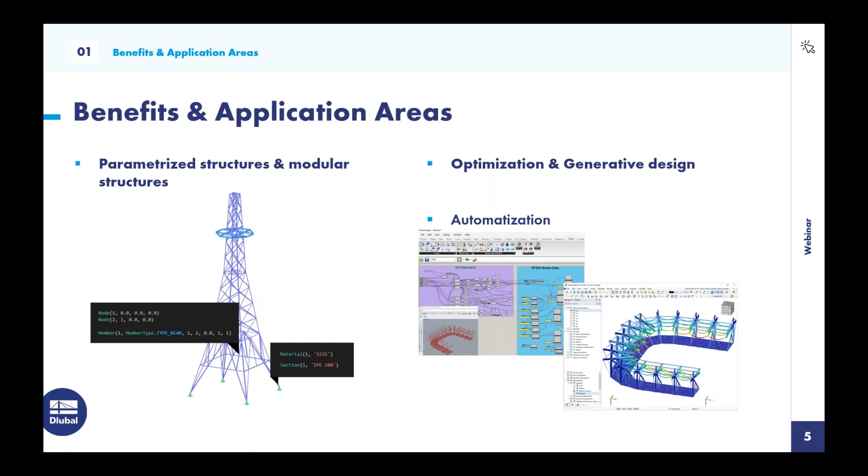So what is an API? API stands for Application Programming Interface. It is basically a messenger; it takes requests, translates, and returns responses. It is a communication protocol between multiple software or services to interact with each other.

To understand the concept better, here is an example. A graphical user interface is the communication protocol between humans and software programs. Most of you are using the RFEM interface and give the program commands with the help of buttons or inputs. In our case, an API has the same function, but between one software and another software.

What are web services? Actually, web services are a form of API, and the distinction lies in style and the way of communication. Web services are XML-based information exchange systems. In our case, we are using an HTTP technology called SOAP, which stands for Simple Object Access Protocol, to make this connection happen. To use this connection in structural analysis and design, frameworks prepared by our team serve very basic functions, which enable the user to give RFEM commands and get responses.

So what's the difference between COM and web services, and why have we changed our technology? Well, RFEM 5 is a native Windows application, it only runs on Windows operating system. RFEM 6 is a platform-independent software which is compiled on Windows, macOS, and Linux. COM technology was a Windows feature which runs on Windows only.

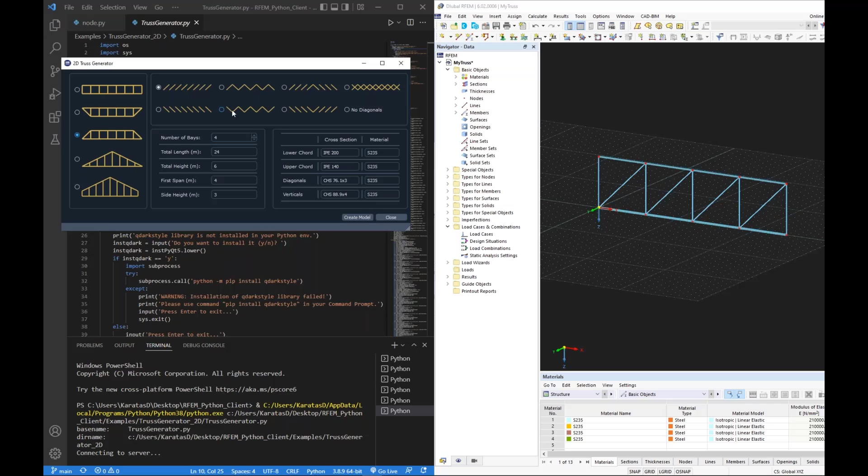If you would like to change the configuration, let me select another configuration for truss and another configuration for diagonals. I'm going to click create model again. And my truss is created.

I can edit the geometry inputs here. Let's say 8. I'll click create model again. And there's a new connection and the truss is created.

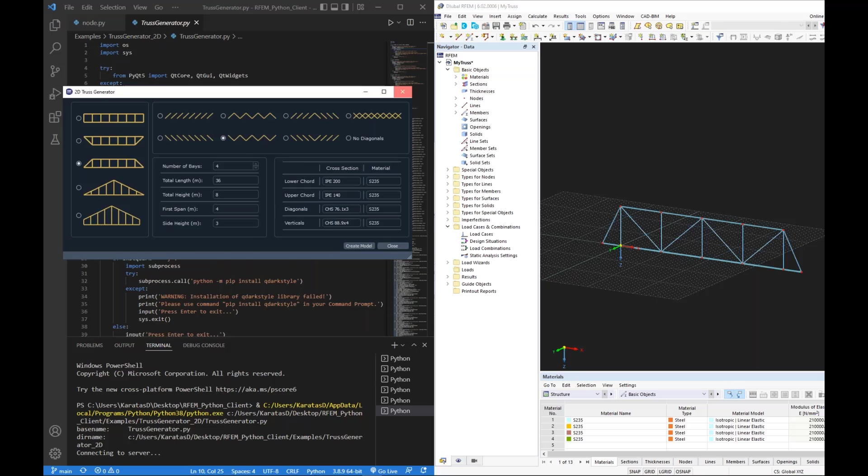Yeah, it's a cool example, I think, and I'm going to show you some other examples. Let me open my new folder. I have prepared some examples for the webinar.

Here I have a tank creator example, which is a console application. It takes 3 inputs for creating a steel tank. These inputs are diameter of the steel tank, height of the tank wall, and height of the arc. If I run this file, there will be a new model named steel tank, and there will be some inputs in the terminal for the parameters.

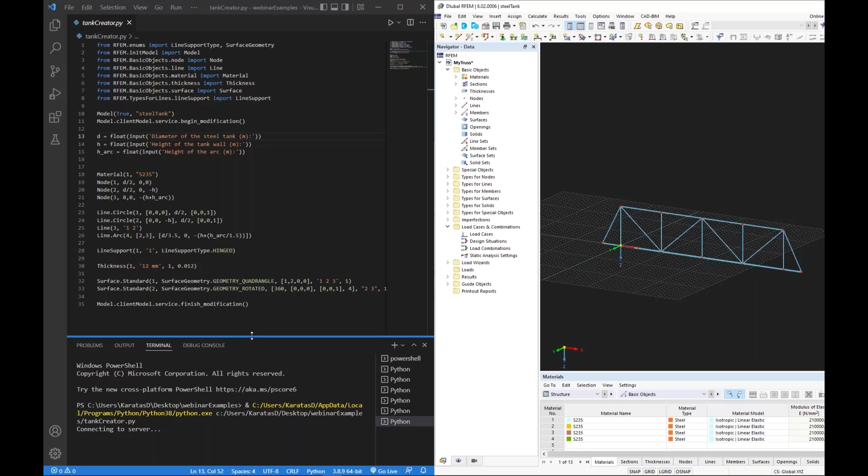Okay, my model is created, steel tank, and my terminal is asking me diameter of the steel tank. Let's say it's 12. The height of the tank wall, let's say 6. And height of the arc is 2.

I'm clicking enter, and objects are updating. Objects are updating in the RFEM now. And my tank is created.

If you would like to edit this script to your needs, you're free to do that and create your own console applications or own graphical user interface. It's that easy. Okay, now I would like to create an example from scratch, and I will be coding this and explaining every line step by step.

Okay, I have created an example here. Let me make it bigger. It's an arced beam with a section IPE 200, with a height of 3 meters and a length of 5 meters. I will create this geometry, create some loading, and take the results. Let me just create a Python file here named arcedbeam.py.

Now the first thing I have to do is import my libraries. I will begin with init model, which contains the Model class. The Model class is important because it's initializing the connection with RFEM6. After that, I need to call the all function from init model. I will be explaining these functions in the code.

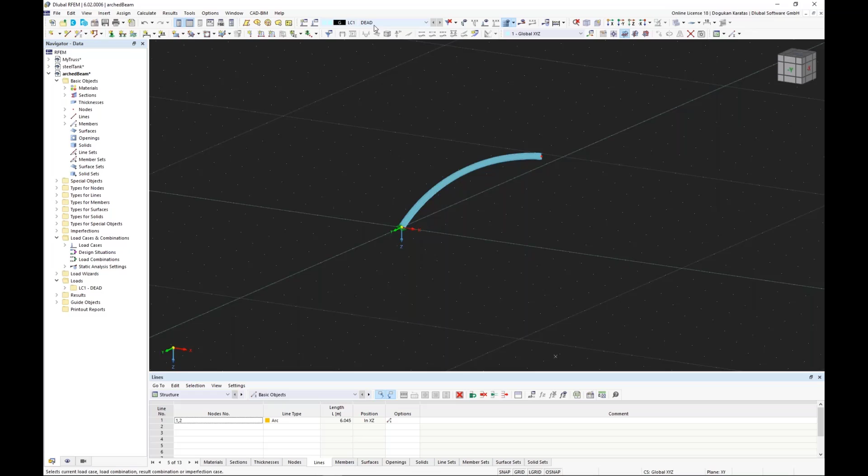Okay, let me make it full screen, and you can see our load case has created, named DEAD. Also, we have the static analysis named linear and self-weight consideration here 001.

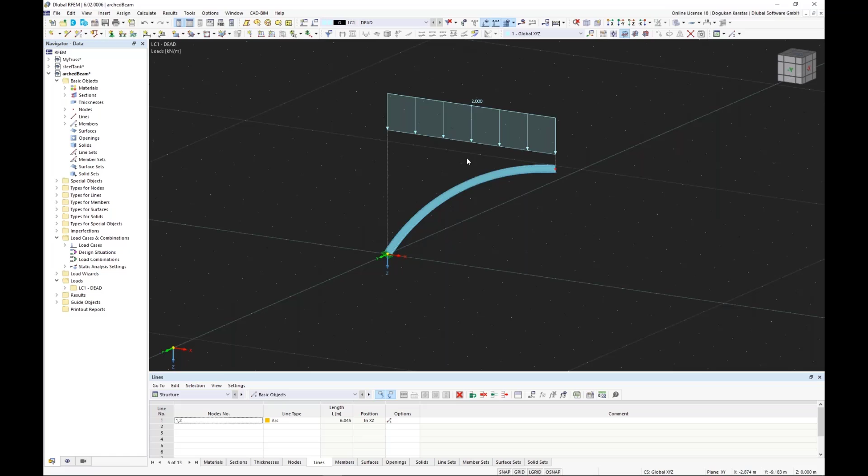Okay, and you can see the loading by clicking this. You can see this is projected set. And of course, since we have calculated, the results are already ready. You can click the results and you can see the results here in the model.

Okay, but for the post process, you would like to get the results out. So I would like to show you some examples how to get the results out. So we have some libraries for exporting results named import export.

And I would like to export the results, and I'm going to import some classes here. You have some choices here. Export the CSV, XML. I would like to show you CSV. Also, I would like to show you the XML file, the result tables here. And additional, we have a report, which is in HTML context. I'm going to import it also.

Export result tables to HTML. Okay, I'm going to export my results. Let's begin with the CSV. I'm opening my brackets, and the only attribute is the path. Okay, I just want to give the same path here. I'm copying my path here, and I'm going to change this name as results CSV.

I would like to create some results tables to XML. I'm copying the same path and rename it as results XML. And finally, I would like to export results to HTML. Okay, I need to give the path again. Results HTML. I have to use the R here. Okay.

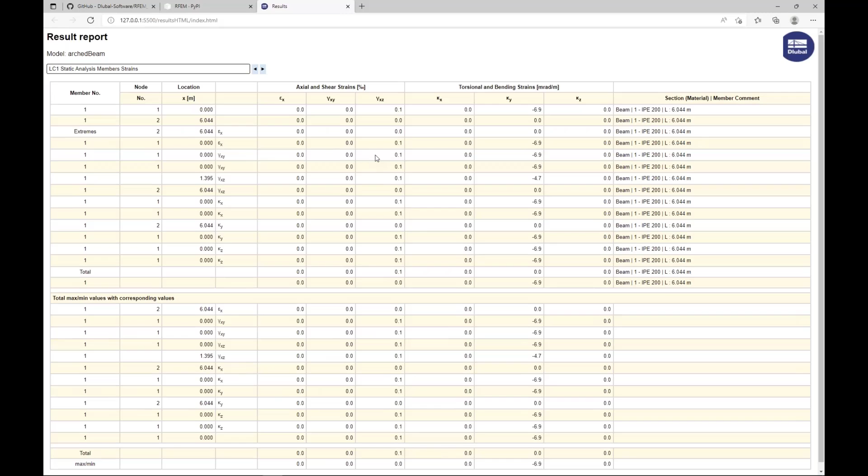I think that's all I can show you. And now I would like to hand over to my colleague Jaroslav for the C# examples.

Okay, thank you, Dogukan. I will show my screen. Okay, so just reshuffle it a bit.

Okay, so I will start with the same entry point as Dogukan did, because what I would like to present is also publicly available in our company GitHub. Here I'll be using the code which is stored in the repository called Dlubal C# client. And here you can download the code in the same way as Dogukan showed you for the presentation related to Python.

What I would like to do is show you how it looks if I download it. So I have an example called Cantilever, and if you open it in Visual Studio, it looks like this.

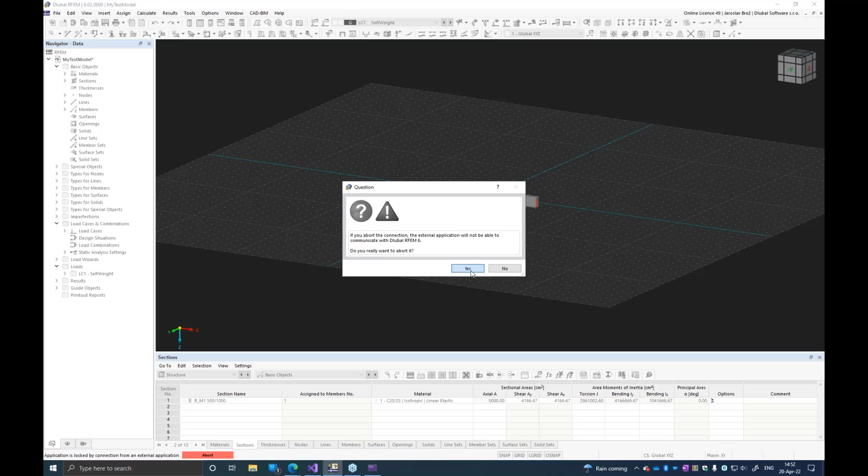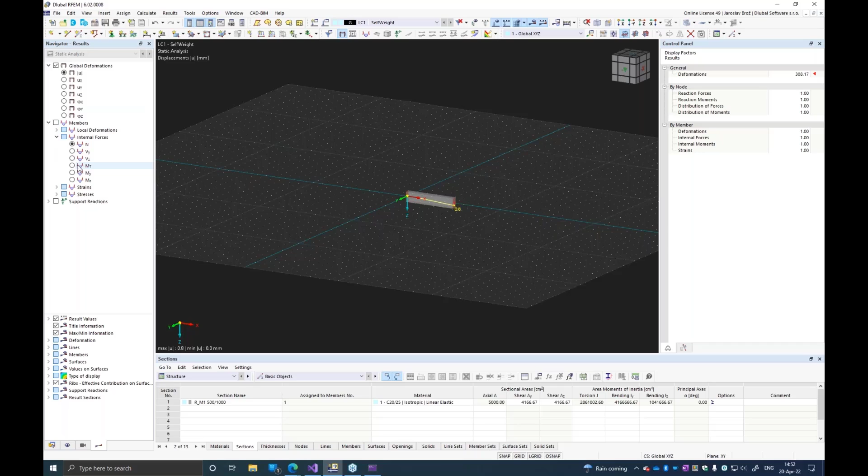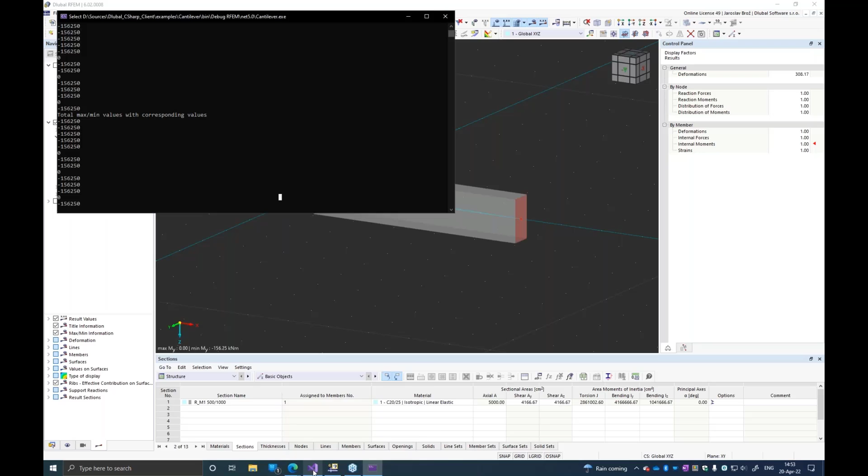So I will break the connection. Here I'll show that I'm using the self-weight only for demonstration purposes. If I show the results, you can see they're calculated, with some values presented in SI units, meaning Newton meters. Here you can see it in kilonewtons. So I'll close this and stop.

This is what I would like to share with you. I can do the same as I did for RFEM, just switch it here into RSTAB. Then the view in the IDE slightly changes. Now I'm using the DLL or library for RSTAB and I can work with it. What I need to do is be sure I have the right address for it.

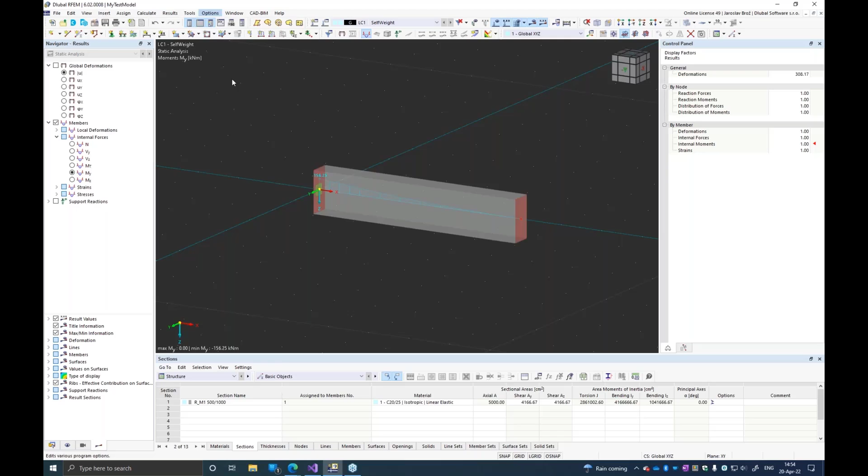I can also open RSTAB and go through the same process in the program options, to check the server port ranges, because if I would like to use RFEM and RSTAB simultaneously, I need to differentiate the port ranges since they will have different URL addresses.

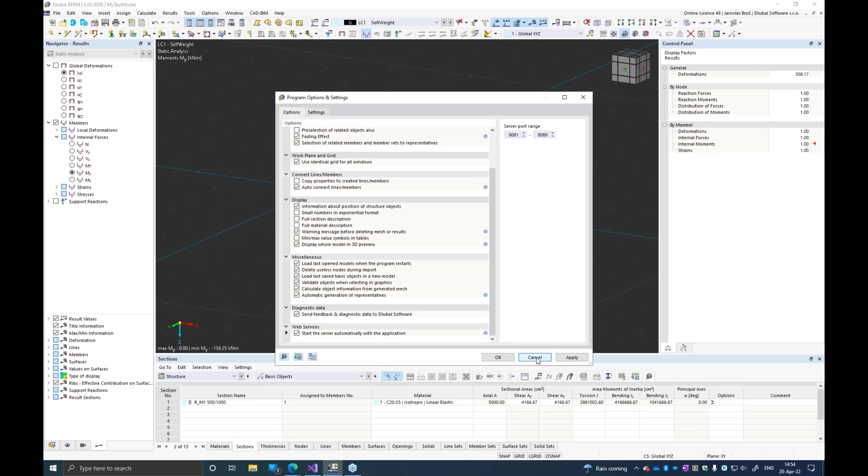That's what I wanted to demonstrate with this example. Let me briefly check - there should also be an object browser, where I will try to find my library. If I have it here... I'm quite lost.

So let's do it differently through this. Basically, here you can see which options you can use for the application, and the same is valid for the model. There's also one option worth showing: if I have a running application, I can type into the URL address box localhost 8081 WSDL, and I can see the description of the requests and responses done in the background.

I can also use extensions like Wizdler to see what methods are available for the application. If I ask it to get me an active model, it will respond with a URL. I can do the same here, and get all the operations I can do with the model client.